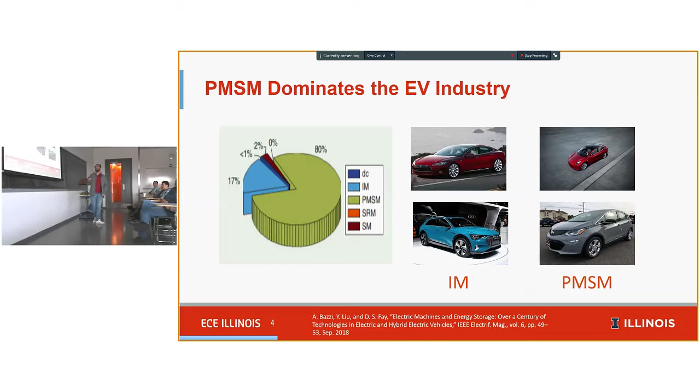So if you use the 2-pole configuration at high speed and the 6-pole configuration at low speed, you don't need to sacrifice in your design meeting both the high-speed consideration and the low-speed consideration. But this is only from a design perspective. What about from an operation perspective? Because most of the time, the electric vehicle is not operating at its rated conditions. In any realistic drive cycle, I couldn't add any image here, but you will operate mostly all within that range. So it's not actually at the rated point.

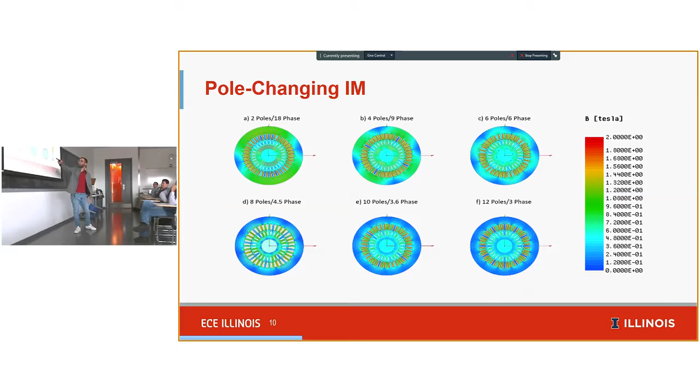So why am I stressing about these poles? Because sometimes if you do pole jumps, as I will show later, you don't actually get the benefit of changing poles. There are practical limitations that will limit you. So you don't want to jump from 6 to 12 directly. That's not a good jump to do from a pole perspective. So here I show the FEA simulations, which show you all of these operations. This is 2-pole, this is the 8-pole 4.5 phase, and 10-pole 3.6 phase system.

And now I will talk about the power electronics. What I wanted to do is to look at what is the main fundamental building block to form a balanced system. And I realized that typically in the literature, if you have 18 phase as the highest phase system, you just put 18 inverters in parallel, and that's it. But I wanted to look if there's more fundamental building blocks that would make it easier, and I realized you can do this with 9. And the beauty about it is that you have 9 independent inverters. So you can configure them any way you want.

You can connect them from the DC bus perspective in series. You can clap them in parallel. You can do a lot of things in this aspect. You can do maybe some twisted way of not using all 9 converters and coming to the same results. I don't know yet, but maybe it can be done. So one of the main things about this, although in this design I'm still using high voltage switches, your DC bus voltage now is required only for 1 slot. So it's a relatively low voltage architecture now.

And low voltage devices have lower on-state resistance. Although I have a lot of switches, they have lower on-state resistance. And the power you're switching now is the power only for 1 slot compared to other motors. So your switching loss will definitely decrease. So you will gain an additional temperature range to operate near the motor because the loss per switch is smaller now.

So now, I introduced pole changing machines, but how do we actually use them in an EV? How do we benefit from them? Because pole is an additional degree of freedom we get that is not available in any other machine. And as I said before, from a drive cycle perspective, you're not always operating at the rated condition. You want to know where do I use which pole.

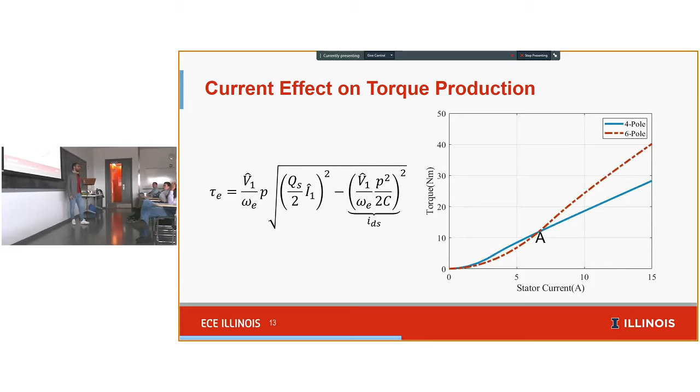So there's an optimization involved here where the pole numbers intersect, and where you would like to use in a certain region a 4-pole, in a certain region a 2-pole, in a certain region a 6-pole, and so on. And this formula is ideal, so it neglects leakage and all resistances.

And then you go to this, one of my favorite curves, because at 18 poles, in one of the papers I read, they didn't get any torque benefit. So we have to predict that beforehand. You cannot design and then say, oh, all right, I won't get any benefit. So what I plotted is I assumed my current rating is 15 amps, and for all of these poles, I have their torque capability.

What's the highest pole number that produces the highest torque? It's 8 poles. You see, 10 and 12 are still below it. So I don't need to actually use them. There will be no benefit of using them unless you allow an overload current of 25 amperes where you can use 10 poles temporarily. Of course, your power electronics has to be designed for that.

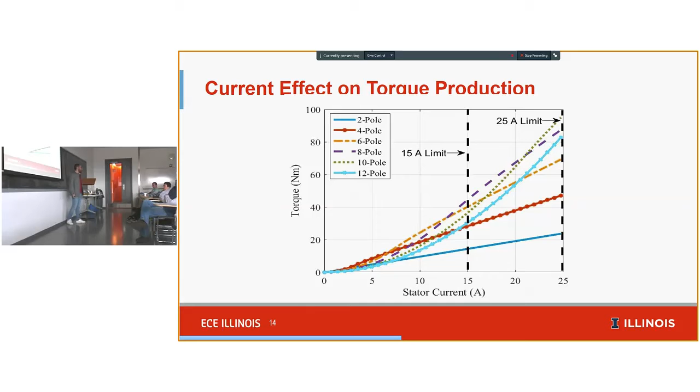Then we switch from 4 to 6. Then we switch from 6 to 8. We're always guaranteeing the maximum torque per ampere in all operating regions. And what's nice about this curve is that it starts to saturate at 8 poles, which is another indication that there's no point in going beyond that.

And these are some of the experimental testing results. Because I'm using only one converter for the time being, I had to wire it as 2 slots per pole per phase. To make a long story short, the 4-pole now requires the 4.5 phase system. So if 4-pole operates, it means the 4.5 phase system works. And it actually worked. And you can see it's a very easy strategy.

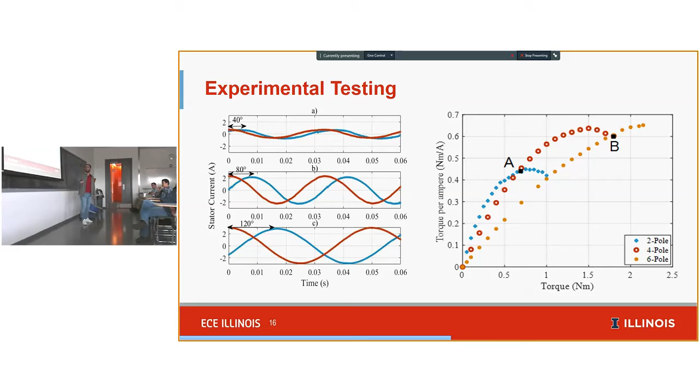So now I'm going to talk about my current research work. So I just mentioned the maximum torque per ampere strategies, but now that we have an additional degree of freedom, we can actually implement any strategy. And a more important strategy from an EV perspective is to maximize efficiency over the whole drive cycle, the whole operating region. Also, there's dynamic performance.

Like I didn't consider it, it's all steady state analysis now. You cannot switch an EV and get a torque bump while you're driving. That's not something you want. And there's also the question: can we simplify the power electronics further? Maybe use less switches or so. At least because 72 switches is still a large number, and we can do it with 2, 4, and 6, but the question is still from a dynamic perspective.

The question remains. And thank you. Any questions?

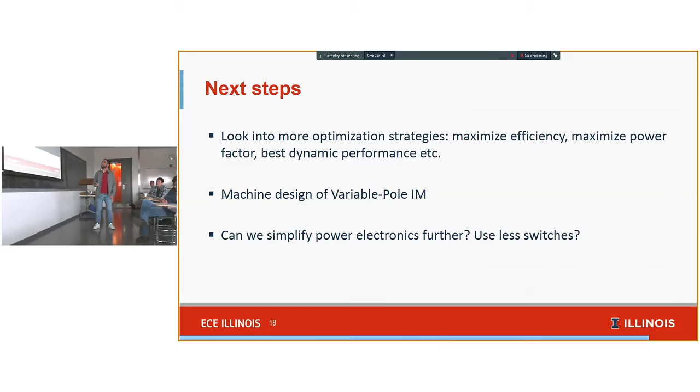Electric vehicle. Yeah. So as a car driver, what I really want is to have a constant torque over a very wide speed range. So when you're driving the car and you press the pedal, you want it to speed up at a constant rate. This is a constant torque. But I saw from your diagram you have a maximum torque at a very, very narrow speed range. So is there a way that you can expand the maximum torque into maybe half the speed?

Yeah, because you can use different excitation. Because at the end of the day, this happens at a certain frequency, right? The 8-pole where it starts to weaken, you're saying that. And most EVs require only the high speed at low torque, so that's a typical EV characteristic. I wish I put one in the slides, but it looks similar to the one displayed here. So all of these are at a fundamental frequency of 60 hertz. You can shift this, and there's also gearing involved.

So I think at the end of the day, if we want a high performance car, then you probably want to compare your work with a Ferrari, not a people's car. Yeah. Because that is directly head to head. Yeah, but also, if you save on efficiency, sometimes I want to use only 3 combinations of poles or 2, save efficiency, and have a simple drive.

There's also saving battery life, saving a lot of things. Basically Tesla said the induction machine is cheaper than the permanent magnet synchronous machine, but the overall cost is more expensive with induction because of the battery sizing issue, because of the efficiency. So if you can address these issues and make it more power dense, there must be a comparison at the end, I'm sure.

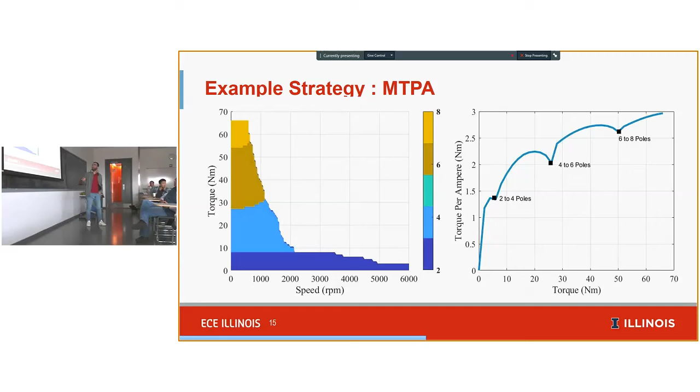Could you go back to where you had the picture of the power converter? So you have 9 half bridges there. Yeah. And then there's 4 inverters on the diagram. Yeah. Actually, this is only one of the 4 units. So this is one unit. So there's 36 of that? There are 4 of that. Each board has 9 half bridges. Oh, so you have 4 of these. Yeah, 4 of these boards.

Yeah. And here I'm still at this point using 650 volt switches, but at the end of the day, each slot required nearly 20 volts. So this power converter is capable of driving the whole machine without another converter. So I still oversized it at this point because I wanted to have that flexibility. That makes sense. I forgot that you must have multiple ones.

All right. Any more questions? Oh, yeah, so getting back to the question about wanting constant speed for the engine, for a regular car this was gotten around by using a transmission with different gear ratios. Would your design be able to eliminate the transmission? So you just have what's going on in the motor, and you don't have this other internal thing that weighs more?

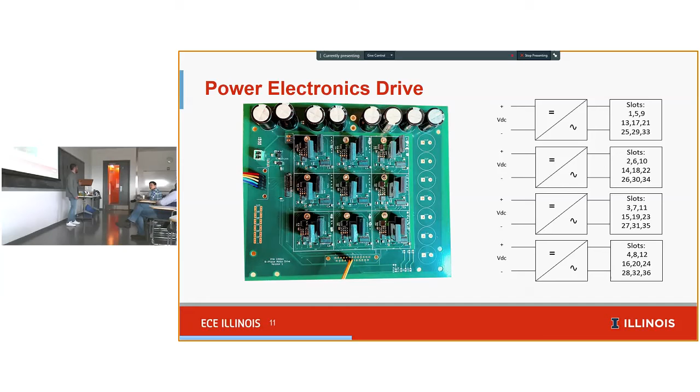You don't need to... If you design it at 2 poles, you might get different advantages. Or at 6 poles, I haven't looked at. Look at it, if you go back to your first slide, when you were showing me this curve, this is like a gear change with a mechanical system. Mm-hmm. So you incorporate a gear change in the electrical system, and then you do a fixed speed gear ratio change. Interesting. That sounds pretty cool.

But this has been explored before. So this is not the contribution of this work. Okay, all right. People have looked at this several times. Like one of Phil's students, Matt Magill, he worked on this. So this concept is not new. Okay, all right. But I'm sure it's new to you. It's new to me, yeah. So that's why it's interesting. But yeah, it's very exciting to us as well. Okay, all right, cool.

But do you think that will reduce the size of the gearbox if you make it a fixed speed instead of having multiple gearbox ratios? Well, I think you might be able to cut down on some of the weight requirements, and that might help with efficiency a little bit, because your car doesn't weigh as much, so you're not having to propel as heavy of a thing, so the torque might be going down. My question is, if you compare a fixed gear ratio versus a variable gear ratio, is there a benefit of having a fixed gear ratio over a variable gear ratio?

From a mechanical perspective, it would depend on the speeds that you're trying to operate in and the torques that you're trying to get out. If you're able to vary that gear ratio, then you can change the amount of torque that's going to the tires coming out of the engine. Versus a fixed gear ratio, that torque transfer is fixed. So that might be one of the reasons why a variable gear ratio might be better than a fixed one for a given application. No, from a size perspective.

Well, my pole number is fixed because of the magnet. Your pole number...

To the left, Kevin. Oh, yeah, there you go. Yes. Can you stand on the other side? Sure.

Thank you, Elie. The next presentation is by Phuc. The topic of his presentation is wind turbine maximum power point tracking via integrated generator-rectifier system. Okay, hello everyone. Thanks for being here today. I know today is a full day, but I promise this is not a lie. This is my research topic, and hopefully there's some truth in that. So the topic I'm talking about is wind turbine maximum power point tracking via the integrated generator-rectifier system.

So first of all, why maximum power point tracking? Because when you put a wind turbine out there, you want to extract the most power out of the wind, so you can sell the electricity for the largest amount of money. That generates more revenue, and based on that revenue, you can pay your workers, you can do maintenance, so you keep the wind industry alive. So that is the reason why you really need to do maximum power point tracking. You don't want to waste the resources.

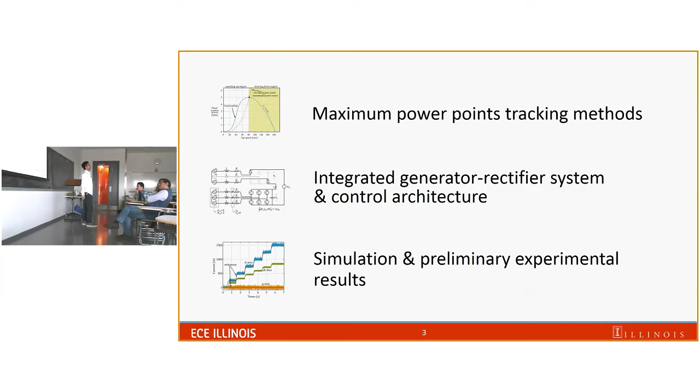For the rest of the talk, I have three things I will go over. Based on the background information, I will talk about some existing methods people have proposed for maximum power point tracking. And if you have been here long enough, you all know that since last year I have been working on a thing we call the integrated generator-rectifier system, and how to use this system to perform maximum power point tracking will be the second point. And the last point is I will show some simulation and some preliminary experimental results to illustrate the concept.

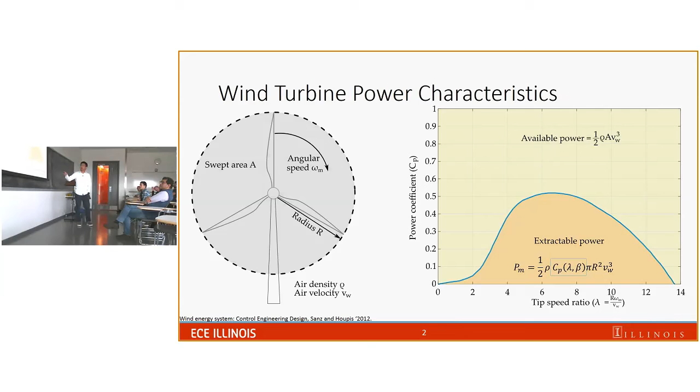So what are the methods available for maximum power point tracking? Remember, this is the curve we are having, and it depends on the wind speed. For each wind speed, you take the wind speed, multiply with the curve, and you plot one individual curve for each wind speed. What you will have is, for each wind speed condition, the maximum power you can extract from the wind. And because this is power, it's proportional to the cube of wind speed, so you will see this is the power curve. So with a wind turbine design, this information is available.

And your electrical system control needs to change. It will measure the tip speed of the wind turbine, and depending on the tip speed of the wind turbine, it will decide how much power it is extracting. And magically, just by doing that, you will force your wind turbine to operate at the maximum power point. This is how that happens.

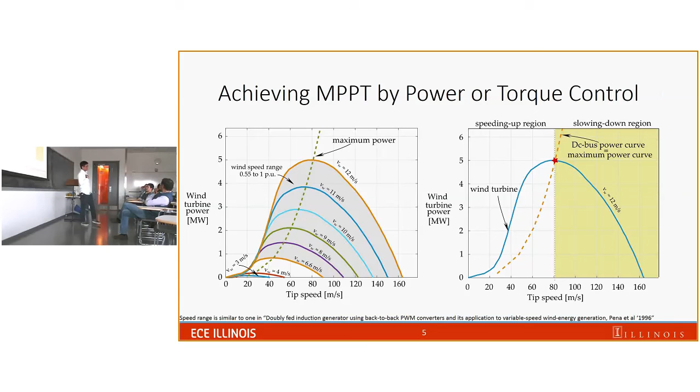This makes a lot more sense, though, because we say we want the maximum power point. What is the point of controlling torque? Why don't you just control power? Yes, it makes more sense to me, but a lot of literature goes to this one because conventionally, when you talk about motor control, you talk about torque, but when you talk about a generation system, you move to power. So power electronics guys love power. Machines guys love torque.

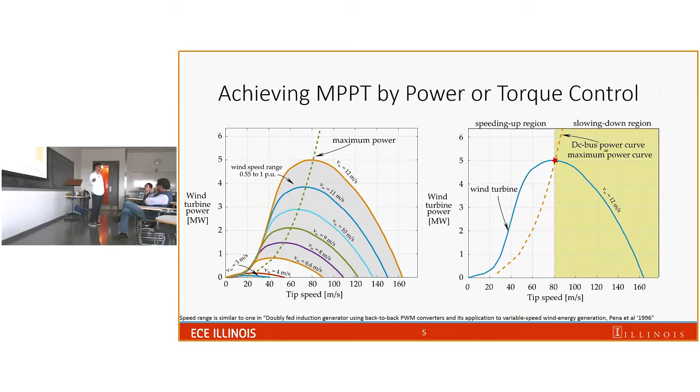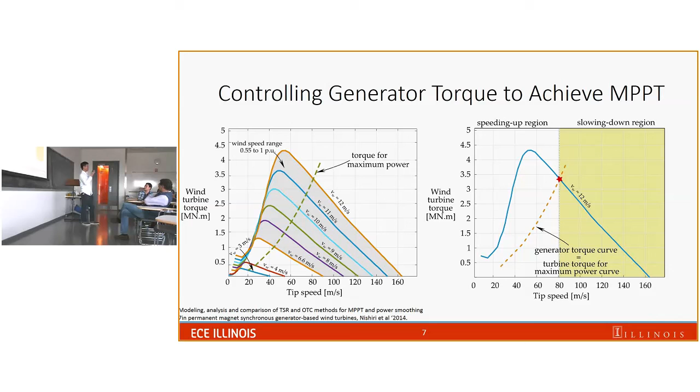With this approach, if you're measuring I and V, or just torque times omega, you could perform Perturb and Observe. Oh yeah, I have that method as well. So what is the benefit of this one? It's fast. Torque control is the fastest control loop you can achieve. And under a fast varying wind speed, you can make the wind turbine perform really well, with fast tracking.

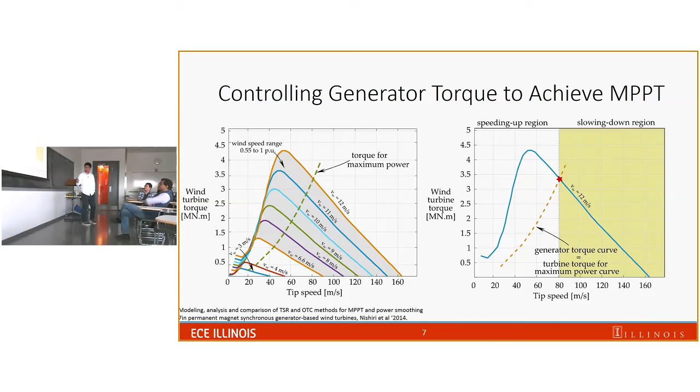Another method is easier. You don't need manufacturer data. You start at a point, you perturb your speed and you observe the output power. Let's say you have a knob to perturb the speed. You increase the speed a little, you see the power increase, then you keep increasing the speed. If you observe a reduction in the power, then you reduce the speed. Given the wind condition doesn't change that fast, you will eventually end up at this point.

There's a lot of literature about how to design the step. But from my perspective, this is much slower compared to the torque control. So if I'm asked to design a control strategy, I will pick the other method because it is faster.

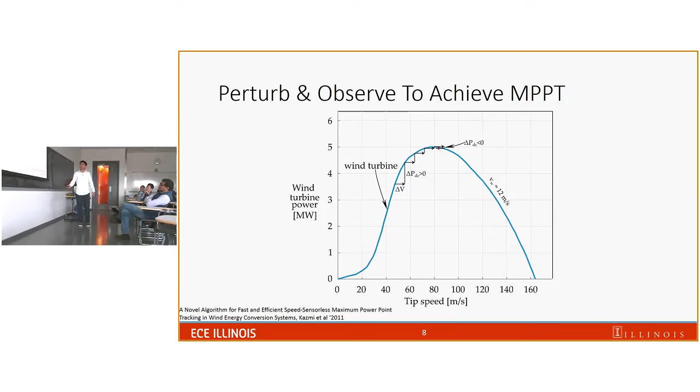So now that is all the background information, and here I go back to the integrated generator-rectifier system and the control architecture we are using. Okay, so the integrated generator rectifier we are proposing is based on a multi-port synchronous generator. Each port will feed either a passive rectifier or an active rectifier, and we already showed that the configuration to give you the optimum, the lowest voltage rating on the active rectifier, is based on one active rectifier, and then you series connect all of them to form a DC bus.

So in the context of wind turbine, that DC bus will connect to a grid. It has to be a DC grid. So the grid interface: if you're talking about the existing wind farm, the collection system is commonly an AC system. But why I put the DC here? Because although they do AC collection system, if it were a permanent magnet synchronous generator, they still have the back-to-back converter. With the back-to-back converter, there's a DC link in between the grid side and generator side, and that forms just a DC collection.

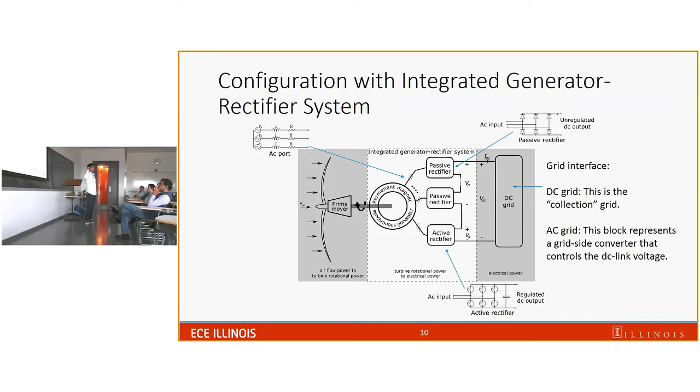It doesn't become obvious here. Say, if I have an active rectifier, yes, you can control the current flow, but what about the passive rectifier? You cannot do anything with the passive rectifier because it's just diodes and you don't have any control degree of freedom there. But in the next slide I show that thanks to this series connection architecture, you can use the active rectifier to control the DC bus current. Whatever current you put out on the active rectifier, there is a mechanism to couple that current to the passive rectifier. I think that is the aha moment when we look into this architecture.

Okay, so to be simple, let's consider an architecture with one active rectifier and one passive rectifier. What you see here is the DC bus voltage is already fixed, and the VP here is also fixed because it is clamped directly to the back EMF from the generator, and the L and R are passive components. The value doesn't change, right? So VP is already fixed. It means that the VA on your active rectifier is already fixed. And because that is an active rectifier, by the power balance equation, you can control the D component of the current on the AC side. VA is already fixed, so therefore you can control the DC current.

And the DC current in the series architecture is the same for this loop. It means that you control the DC current going out of your active rectifier, and because of the series connection, that DC current will be the same as the current going out of the passive rectifier, and at the end of the day, you will achieve control of the DC current flowing into the DC bus. So this is the basis for the rest of the work.

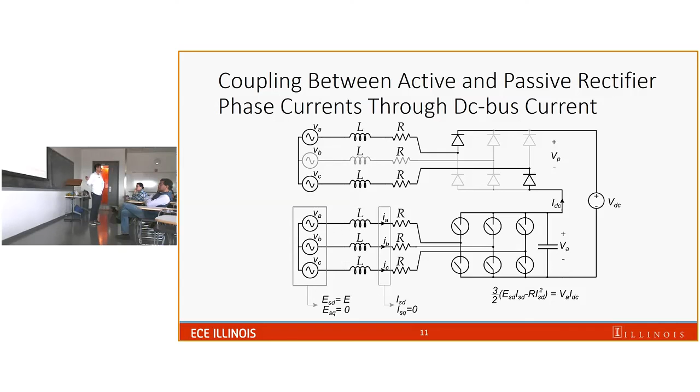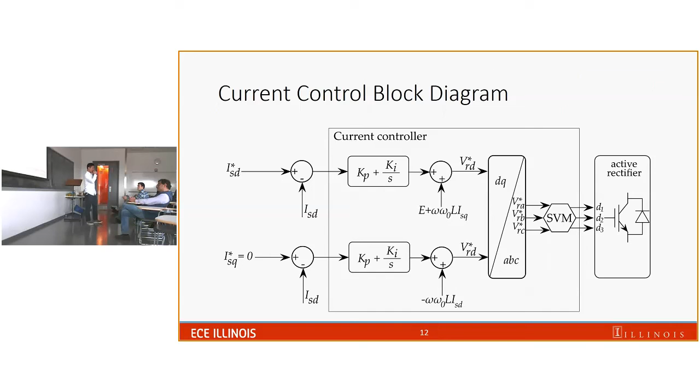So in order to achieve the current control, we use the standard DQ current controller. One current controller for D-axis current and another current controller for the Q-axis current. The current controller is fairly simple to construct. It's basically a PI controller with a feed-forward term. At the end of the day, you put in the ISD star, the command current you want, and this controller will give out the actual ISD current that you want. And by that ISD, you can control the DC bus current.

And so when you already have the current control capability, it means that you can control the power. Then you put another MPPT controller to decide what is the ISD star you need for each wind condition. That is another outer loop controller. With this controller, you can do either power or torque control. At the end of the day, you take the measurement of the rotational speed of your wind turbine, compare it to the torque speed characteristic that I showed before, and it will give you the PDC, the reference power you need to track.

And we already showed there is an analytical relation between the power and the D-axis current. That is in ECCE 2019. If you follow that publication, you will see the analytical relation. And when we solve for that, we just send the ISD reference to the current control. Yes? You're controlling the machine field? The D-axis current.

Yeah, I wasn't sure on that point. You have a comment on the machine field? Come on. Whose work is this? Yeah, it's my work.

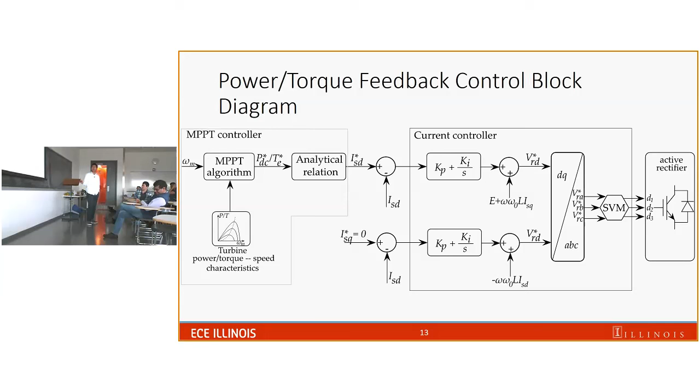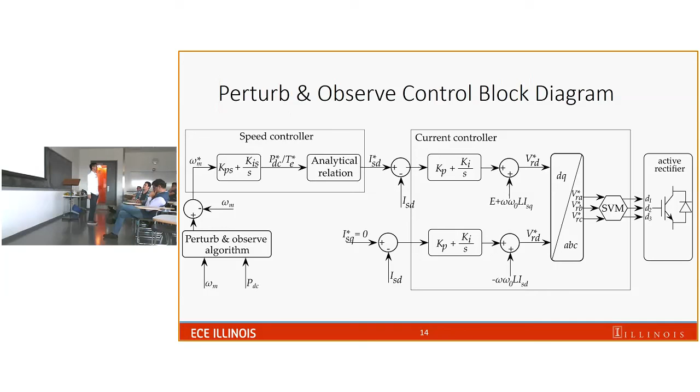So with the same architecture, we can also do the perturb and observe block diagram. We make a perturb algorithm here: we take the speed, we perturb the speed a little bit, and we observe the power output, then we compare with the previous step to see if it increased or decreased, and we decide the next step. So as long as we figure out the current controller part, the rest just depends on what MPPT algorithm you want to use.

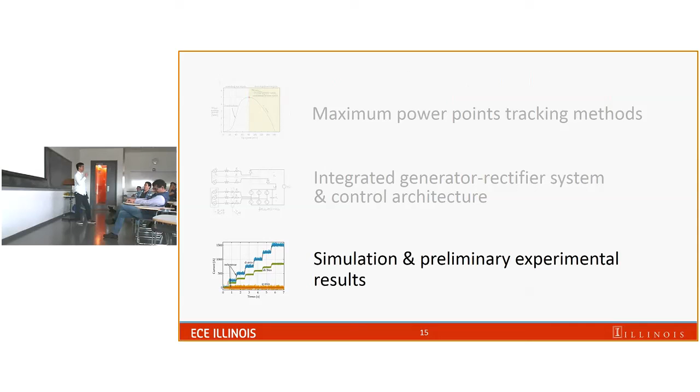So you increase the amplitude of phase A current of the active rectifier, then the amplitude of the diode bridge current will increase as well. It will follow because of the series connection. Then by controlling the current coming out of the active rectifier, you indirectly achieve the current control on the passive rectifier as well.

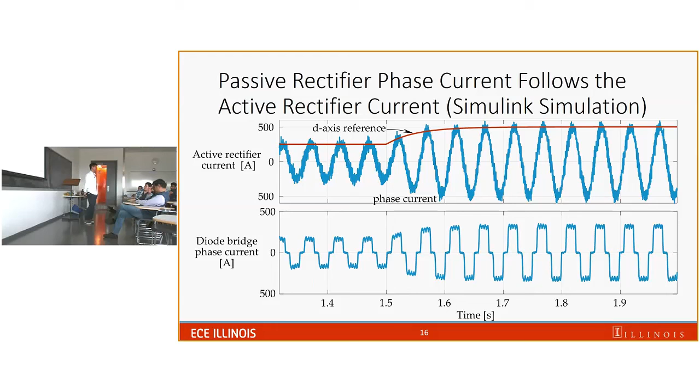Yes? Sorry, could you go back to... What is constant? Like the torque on the driving machine, or the speed of the driving machine? So here, what we keep constant is the speed, and the DC bus voltage is constant. So we show that for a given shaft speed, we can draw various levels of power. So based on that, we can speed up or slow down. And when we move to the next step, we can do the same thing to speed up or slow down.

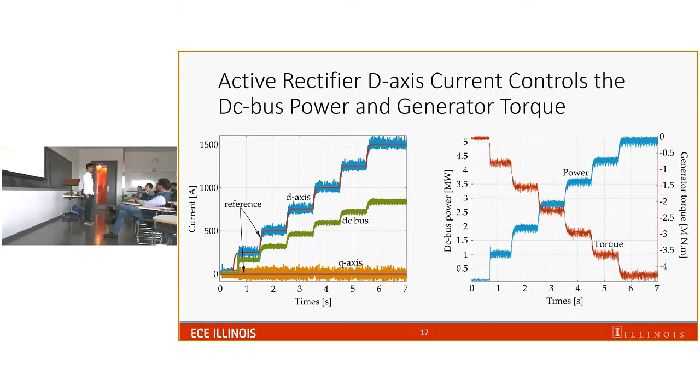And we go to our experimental setup. We have an active rectifier series connected with the two passive ones, and it forms a DC bus, and it feeds an electronic load. This electronic load keeps the DC bus voltage constant; we operate in constant voltage mode, so it looks like a DC grid from our perspective. And we have the controller of the dyno. At this moment, we keep the dyno running in speed mode, keeping the speed constant.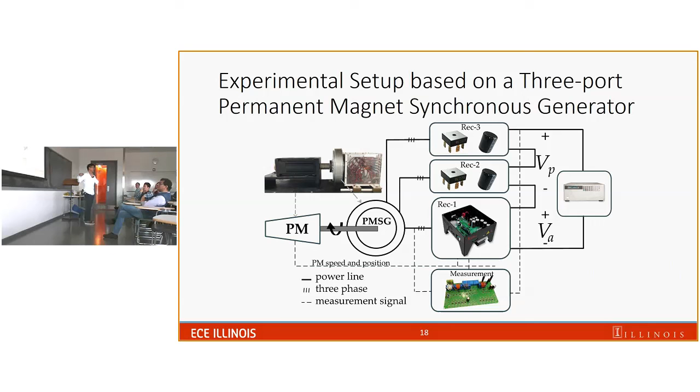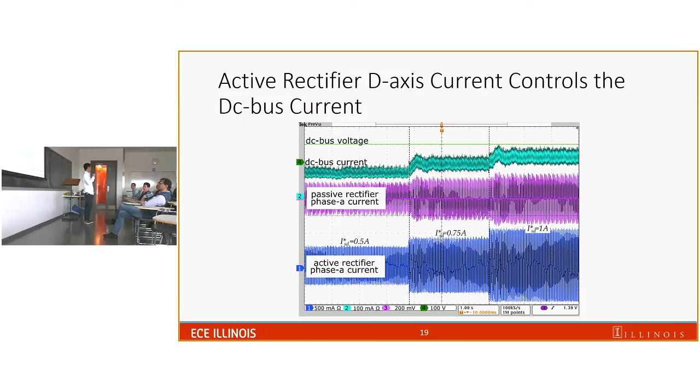And then what we do is vary the D-axis current of the active rectifier. As you see, varying the D-axis current leads to variation of the amplitude of the phase A current. The phase current in the active rectifier causes a change in the phase current of the diode bridge, and eventually leads to a change in the total DC bus current. So by this, we illustrate experimentally that by controlling the D-axis current of the active rectifier, we achieve power control into the DC bus.